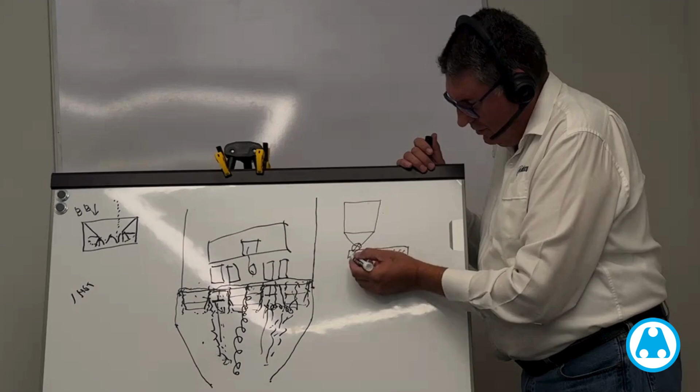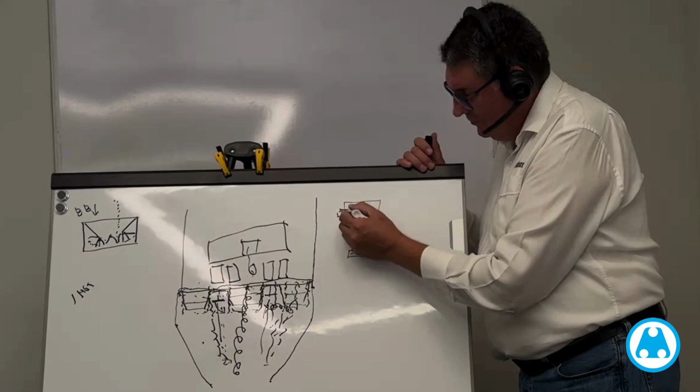Put some valves on it. I'm going to put the valves here for the time being. Alright, and I'm putting them on what I consider to be the wrong side for a reason. Bags. There's our cell plate. There's our bags. Let's talk about a system that will actually work.

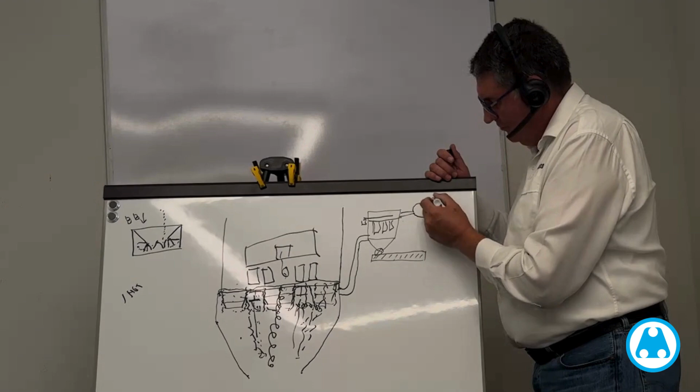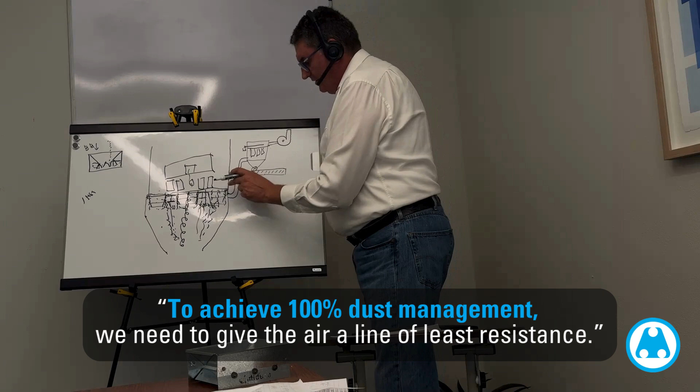That's our duct. Actually, no, I'll even add the fan because it has value later on. I've drawn that fan disproportionately big to remind myself of something. So, what we do now is, we know we've put resistance across the top of the hopper in the form of the baffles, right? So if we want to get 100% dust management, all we've got to do is give the air a line of least resistance.

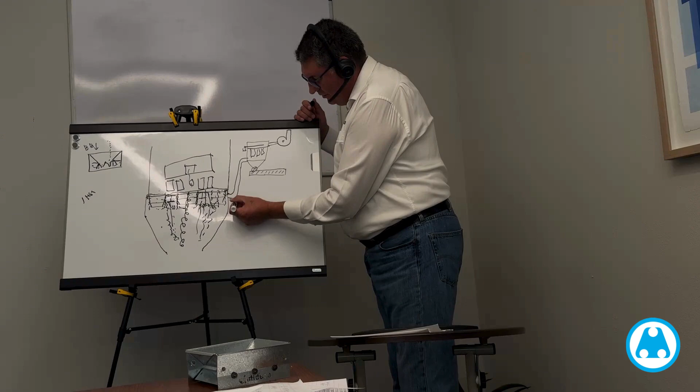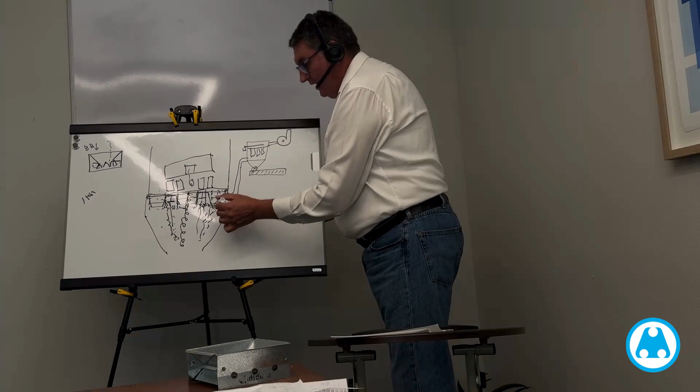So if we put some negative P, is that a negative P? Yeah. If we put some negative pressure on the hopper in the form of a dust extractor, the air that was percolating up now has a line of least resistance and it's into the baghouse. So we're dealing with the displaced air and therefore the dust before it exits the hopper, right? So what's going on up here is now totally isolated from what's going on down here.

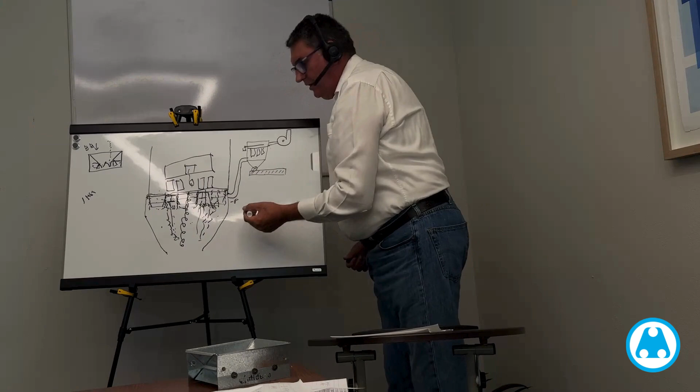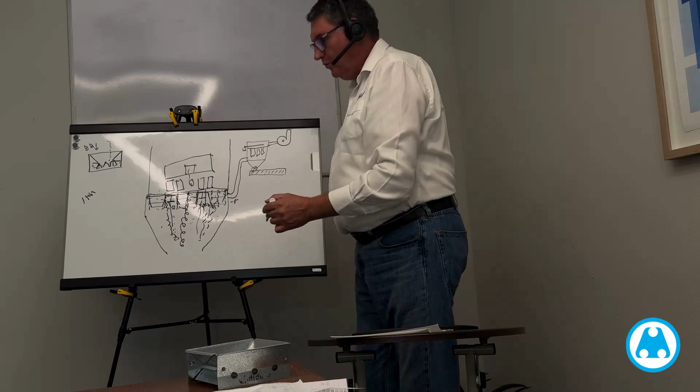So we put the negative pressure on it and we draw the air up into the baghouse. We have now got total control of what's going on inside that space, and that's what we need. The baffles are great, fantastic actually, but what they do is they allow us to control this space. Once we've got control of this space, we've got control of the air, and therefore control of the dust.